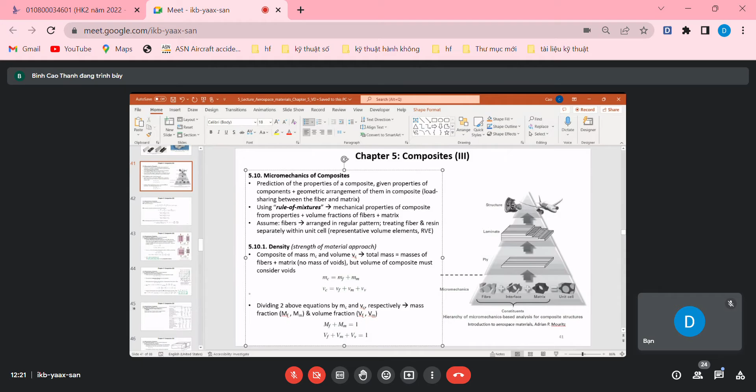And how can we calculate the density of the composite? We know that rho equals m divided by Vc, mass per unit volume. And therefore the mc is equal to the mass of the fiber plus the mass of the matrix. And by using this equation, m equals rho c multiplied by Vc. So by substituting f or m for c, you will have the equations to calculate mc, mf and mm, by using these equations.

And simplifying, we have the density of the composite is equal to density of the fiber multiplied by the volume fraction of the fiber plus the density of the matrix materials multiplied by the volume fraction of the matrix. So this is the mathematical representation to calculate the density of the composite based on the density and volume fraction of each component.

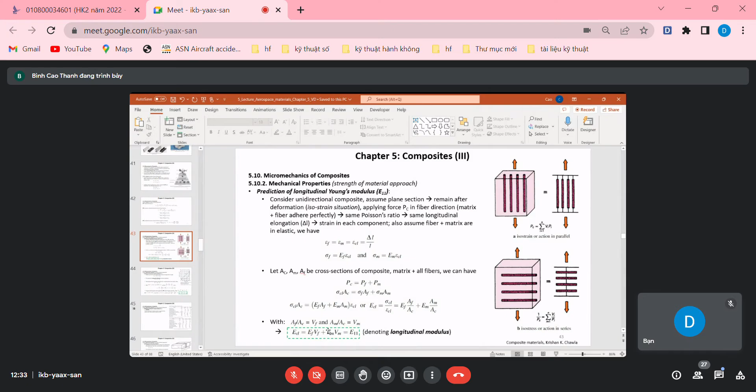Okay. And now we can predict the value of the Young modulus in the transverse direction. The transverse Young modulus is denoted E22. And we have a similar expression. But in this case, we consider that in the transverse direction, the stress applied to the composite will be equal to the stress applied to the fiber and the stress applied to the matrix. So it's different from the previous case where you have equal strains. But now in the direction perpendicular to the longitudinal direction, we have the isostress situation where the stress of the composite equals the stress of the fiber and the stress of the matrix.

The total displacement in thickness direction, denoted delta Tc, equals the displacement of the matrix plus that of the fiber. And we have delta Tc equal to delta Tm plus delta Tf. Yes, total displacement in thickness direction of the composite equals the total displacement in thickness direction of each component. And delta Tc divided by Tc, we still call biến dạng tỷ đối, equals the strain of the composite in the transverse direction. The delta Tm equals the epsilon m multiplied by Tm, and so on.

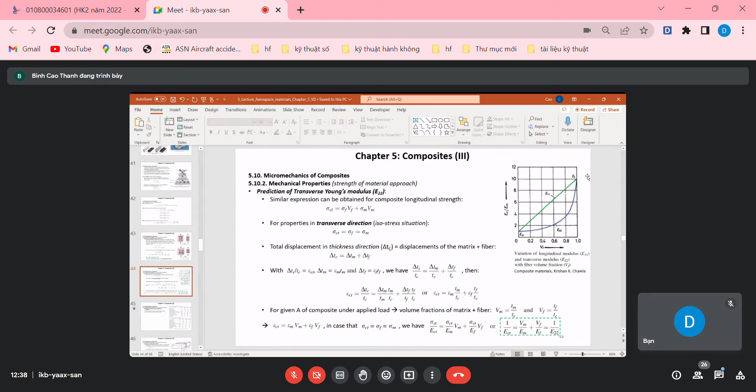Here, for example, you can predict the transversal Young modulus E22 of a composite. So let's say a glass fiber reinforced epoxy resin with a fiber volume fraction of 70%, and you have the two tables in order to find the relating values of the axial modulus of, for example, the glass fibers, or the transversal modulus. Here we need to know about the transversal modulus of the matrix material, and the matrix material is epoxy within the composite.

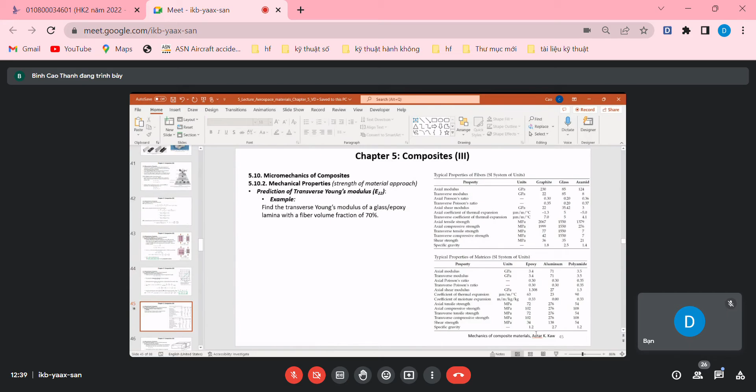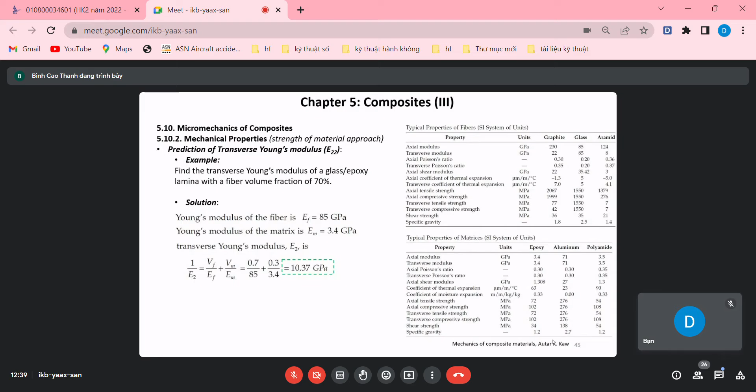So in order to save time, I will introduce the answer. So it's quite easy. You have the Young modulus of the fiber, so the glass fiber is here for the transversal Young modulus. And you have the epoxy here, 3.4. So actually you need to know about the axial modulus because the equation is set up based on the axial modulus. And the transversal modulus of the composite is calculated based on the axial modulus of each component.

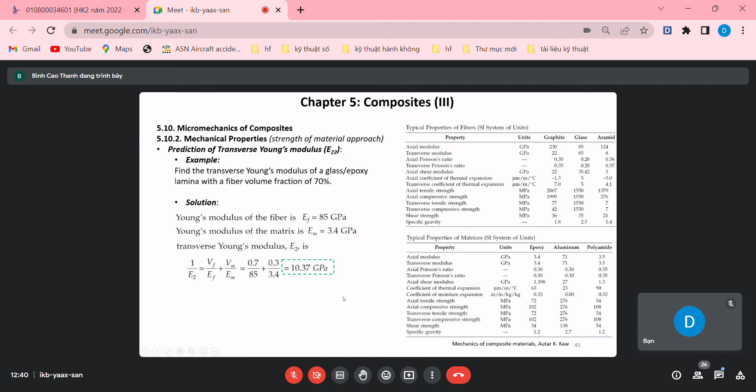So you need to know about the Young modulus of each component, and you need to know about the volume fraction of the fiber and the epoxy. The volume fraction of the fiber is 70% and 30% of the epoxy as the matrix to bind the fibers together. And by using this equation, you can find out the value. So probably the value is E2 equal to 10.37 gigapascal, but not put in these equations. Just to show you an example.

Yes, and the next one is the prediction of in-plane shear modulus. For this case, we consider different representative volume elements where you have an element representing the reinforcement, so could be the fibers, and on the right side and on the left side of the fiber would be the volume representing the matrix materials. You have the thickness as Tm, T matrix divided by 2, and T is the thickness of the reinforcement, and the total thickness is the thickness of the composite, with the shear stress here tau c.

We apply pure shear stress tau c to the lamina. The shear deformation will be denoted as delta C for the composite, delta F for the fiber, delta M for the matrix, and total deformation of the composite will be equal to the sum of the deformation of the fiber and that of the matrix. Based on the definition of the shear strain, we have delta C equal to gamma C multiplied by Tc and so on. And from Hooke's law, we have gamma C equal to tau C divided by the shear modulus of the material, G12, and similarly with the fiber and the matrix.

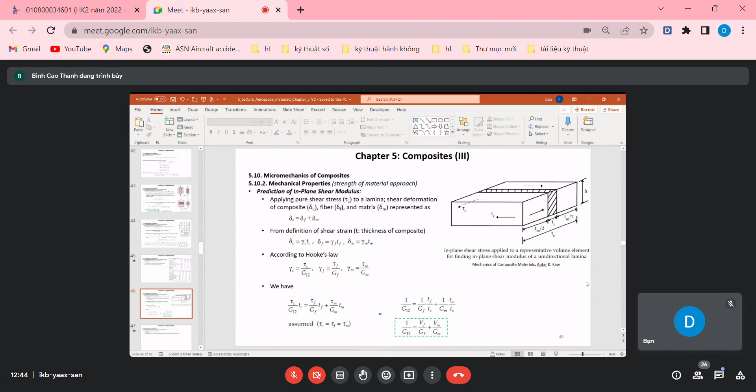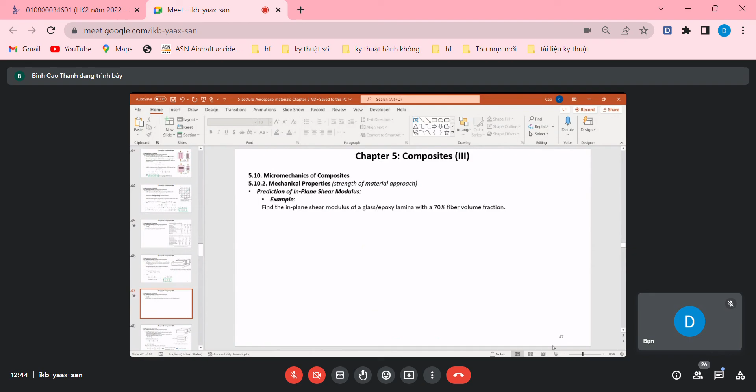Now you have another example for predicting in-plane shear modulus. This example asks you to find the in-plane shear modulus of a glass epoxy lamina with a 70% fiber volume fraction. The known data are the same as for the previous example. So not so complicated, if not easy. We have glass fiber and epoxy matrix, and we assume that they have isotropic properties, for each component. This is one issue.